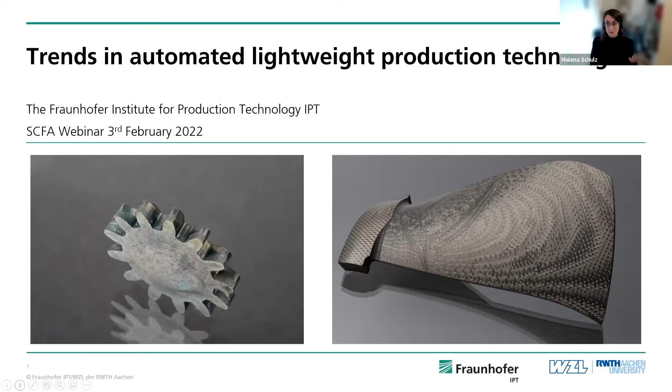Today we're going to show you how to produce composite fan blades or to process high-strength steels for lightweight structures. And we provide you with solutions how to do that in an automated and upscaled way, because we are system builders, or I like to say we're actually doing what mechanical engineering is called in Germany, because mechanical engineering is actually called building machines. So the word Maschinenbauer, and that's what we do here in our department. And we do that on the one hand for composites, and on the other hand for high strength steels, where we show you some applications and use cases. But let's start with our system technology.

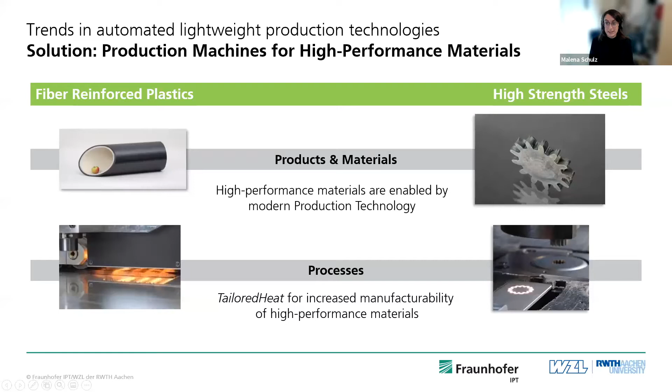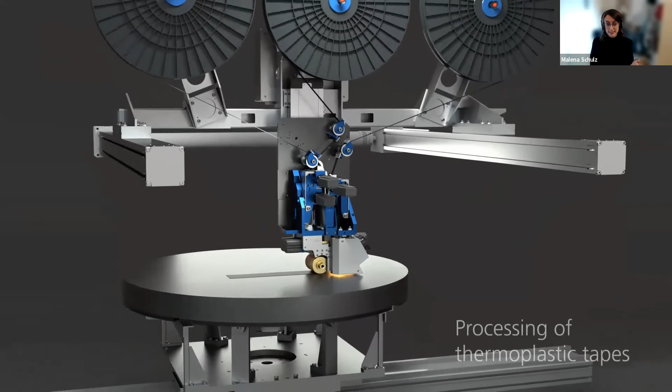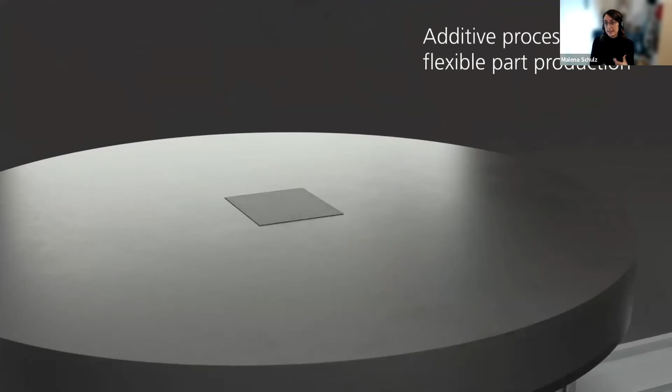As a leader in the composites group, we're building such machines, which you can see here in this animated video, where we stack tape by tape. That's how the composite material is called here, in order to create near net shape composite parts. And the new thing here, what we're focusing on, is especially to automate that.

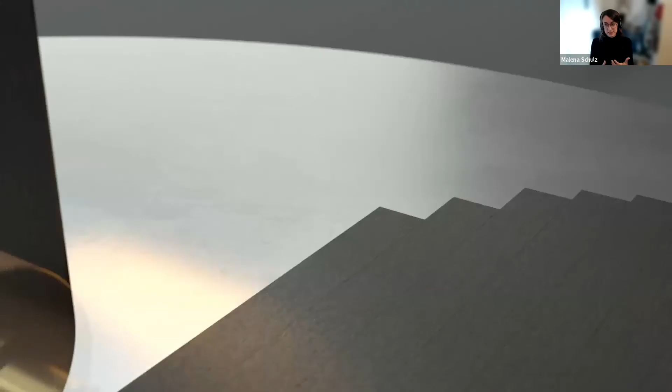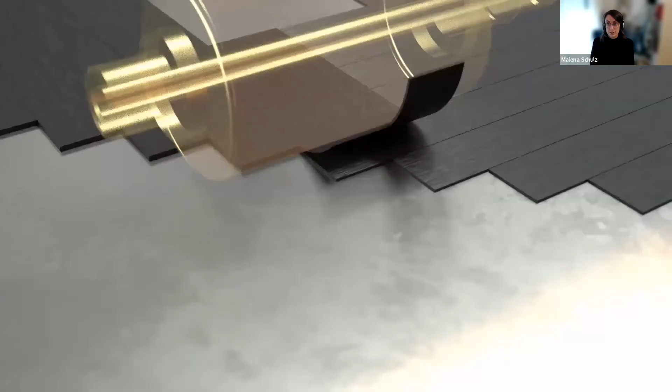So it's a lot about how to upscale composite production, which is actually a very manual based production technology, and how to use novel methodologies like digital twinning, etc., to increase the acceptance in industry, and also to provide the requested productivity, for example, in the automotive sector, in which more and more composites become apparent, but it still faces some challenges, especially regarding costs.

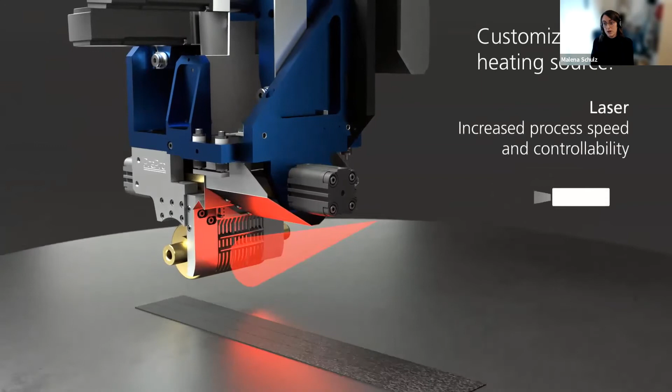And the focus we have here in our department is especially how to customize the heating source in order to gain these kinds of quality produced, near net shape parts. I hand over to Flo back again.

Okay, thanks. Maybe you thought initially, how do composite production and laser systems go together? But actually, as you might have already guessed from this little video, our processes are all about applying energy to the workpiece in a very controlled and precise way, in order to allow for the product quality that we want. And so in our group, we are more focusing on high strength steels as another lightweight material, especially

in the automotive industry. And one example is that we are researching how to bring these technologies into the processes that are already there and that are already very productive. And what you see now is that we have different heating technologies. So we are not only focused on laser technology, but we rather look at which technology suits the use case best.

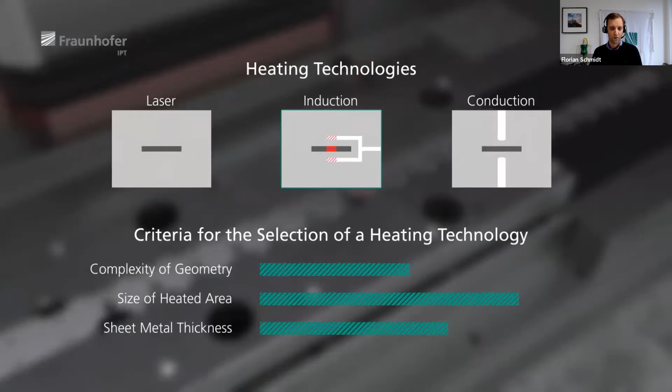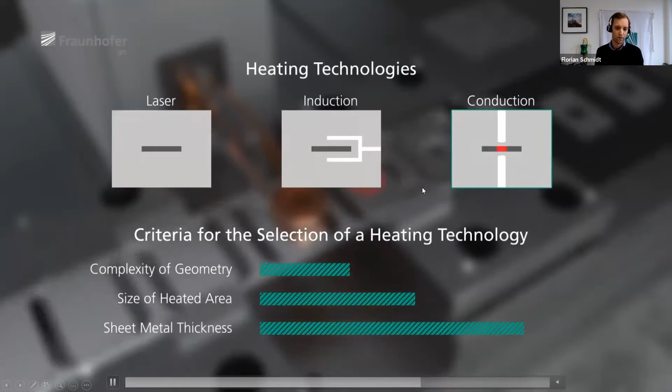So this, for example, is a continuous production of sheet metal parts. And we've integrated different heating technologies into the progressive die tool in the press. And so we are able to manipulate the material locally and within the cycle time of this highly productive process. For example, we also apply induction heating technology, or also electrical resistance heating. And this is really a case-by-case assessment, which one of these technologies is best suited for the application at hand.

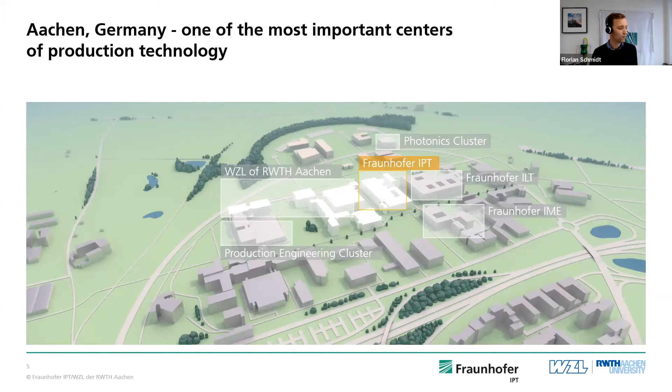So Aachen is quite a big research center for production technology, and we are proud to host 3 Fraunhofer centers at one location very close to each other, actually only a few minutes away from each other. Just very briefly, maybe you've heard some of these 4 names. So production technology is quite an interdisciplinary field. It's not only about a machine, it's not only about a process.

It's about how these two interplay, and it's also about how the quality of the process and of the machine is assessed. And finally, everything needs to be economical in the end. So that's why technology management is also one focus of our center. And these are the 4 professors that lead the 4 departments. And well, we are obviously from production machines, but we always have a good collaboration with our colleagues from the other departments.

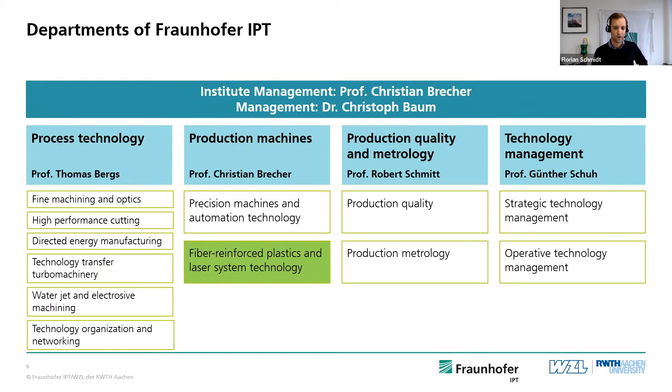So what are the current trends in automated lightweight production? So definitely we are facing the question of what the mobility of the future will look like. Just some buzzwords: we certainly have new energy sources like electromobility, or also hydrogen based mobility, and these have different implications for the structures of, let's say, vehicles, and also then the production technologies that are used

to build these structures. And on the other hand, we are also, of course, focusing on doing what we do more efficiently and more environmentally friendly. So, for example, recycling technologies or energy efficient processing, as you will see in the following slides, are big drivers of what we do.

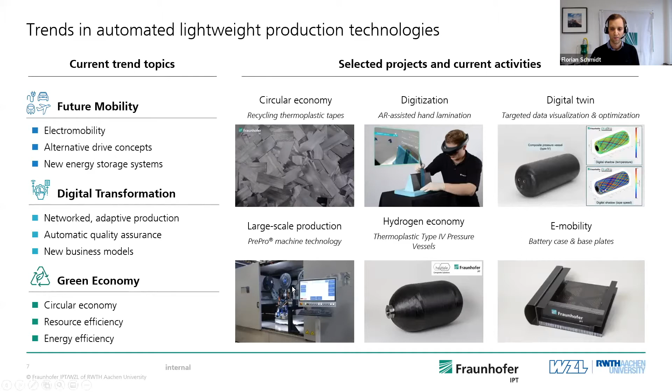So just to give you a quick framework about what lightweight means. Lightweight can have different dimensions, and today we are mainly focusing on different materials. So having materials with lightweight properties, but there is of course also lightweight design, like you've seen in 3D printing with optimized topologies, or different concepts of how to build new parts in a new way, or to integrate functions into lightweight parts. But as I said, we are mainly focusing on materials and of course the production technologies used to shape these materials.

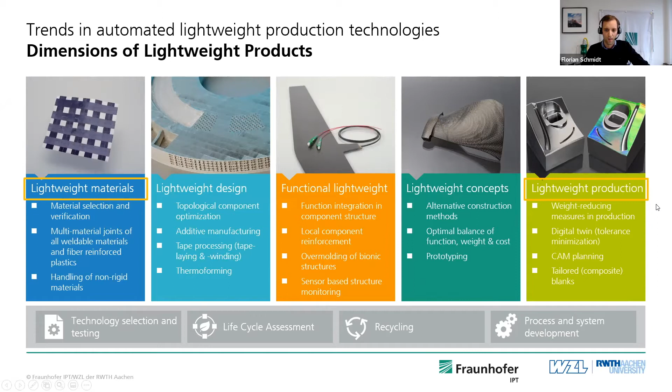What's the technological driver of different lightweight materials? We will focus on high strength steels and composites, especially carbon fiber reinforced plastics. These have a very good component weight ratio compared to conventional steel materials. With high strength steels, due to the higher strength, we can use thinner structures, saving approximately 20% of the weight for a comparable component. With carbon fiber, the potential is even bigger - you could halve the weight of your component.

But on the other hand, it comes at a cost, and that's basically what we are targeting. We are trying to develop new technologies that make the application of these new materials competitive, trying to cut down costs. Especially with carbon fiber, there's a huge cost disadvantage that needs to be justified. So that's our mission - to reduce this and bring these materials into application.

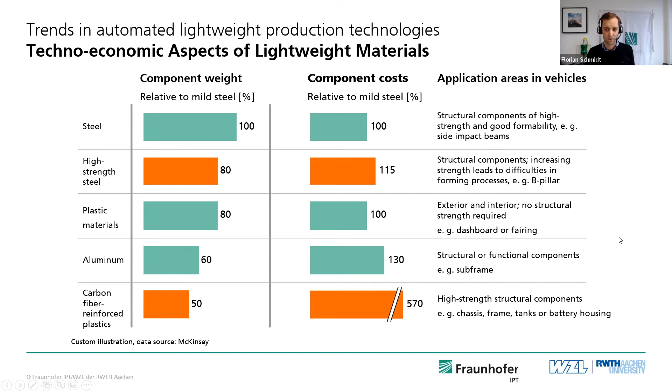On the other hand, based on the global trends you just saw, the composite market, the lightweight market is steadily growing, having surpassed 100 billion euros a few years ago. Especially high strength steels are increasingly used, particularly in automotive industries. I think composites are also growing, but it's still a kind of niche market that needs to find its way into mass production.

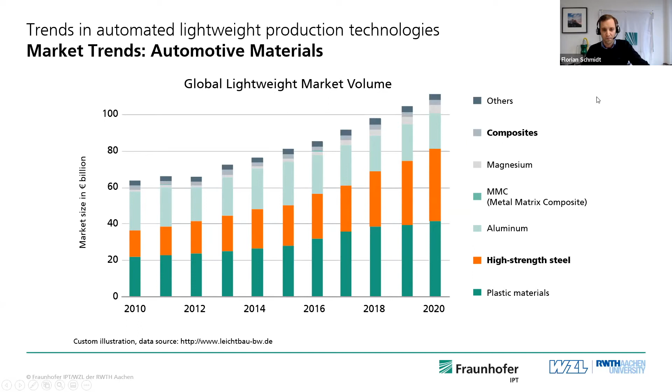One example - if you look at the current vehicle, this is McKinsey data about the projected material mix in a vehicle of the future. You can see there is increasingly more of these lightweight materials in a product, in a car, let's say, and this, as you might imagine, makes production technology a lot more complicated than if you just have 50% of very easy to shape steels, for example.

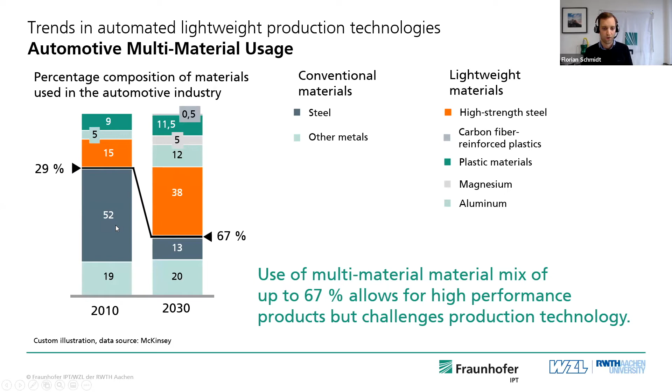So this is what drives our research. Trying to bridge the gap to what I'm showing you about our particular research.

I brought you one example about press hardening. You might have heard of that for sure. This is about heating press hardening steels in a furnace and then putting them into a tool, shaping them and giving them specialized hardness and strength properties. So this is the trend that we are seeing.

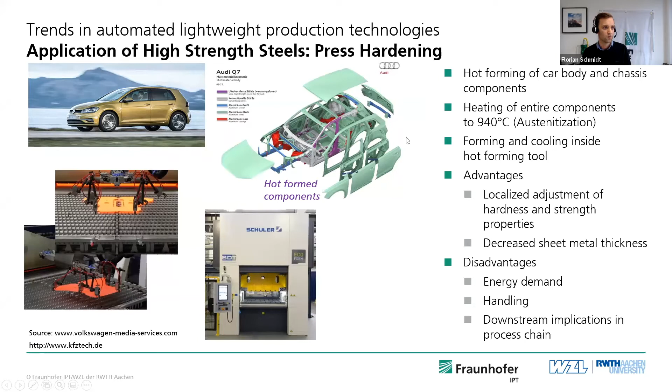It's not a monolithic component made from one material processed in a very easy way, but it's getting more and more complex, and you even have localized material properties, for example, in a B pillar or other structural components in a car. This gives you certainly a lot of advantages, but on the other hand, you have higher energy demands. You need to have your handling systems in place, and also it has different downstream implications, for example, if you want to cut these things in further processing steps, or if you want to integrate functions - it gets difficult if you increase the strength of the materials.

That's why we use thermal assisted sheet metal working for high strength steels. The motivation is really to enable the material, or enable the current processes like cutting or forming, to give us better results with these high strength materials.

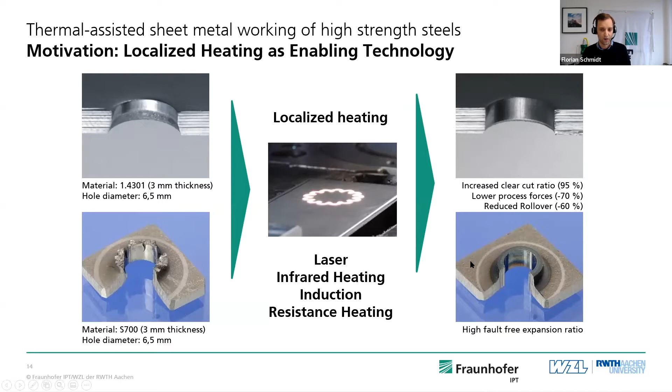For example, if we look at shearing, we are able to heat up the materials and increase the clear cut ratio, so you see there is less fracture, there's better quality of the cut. Also for forming, higher expansion ratios or higher forming ratios can be achieved by applying heat in a very precise way using different heating technologies.

So if you like, later on you can have a look at these videos again - this is some of our technology videos. But basically, as I said, we always look for which technology is best suited, for example, how complex your heating should be, how thick the material is, and how large of an area you want to heat up.

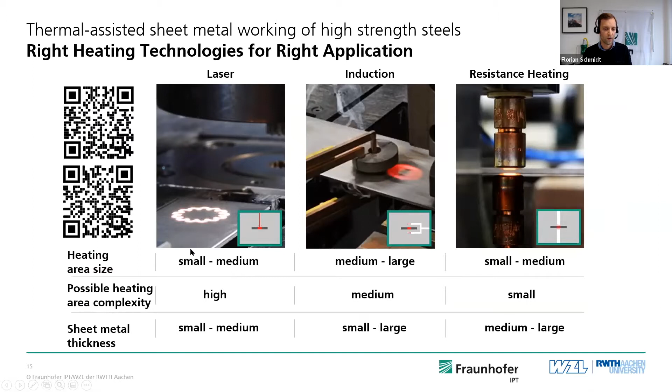Now I brought you some product examples that are from real world projects, either research projects or sometimes also bilateral projects. This should show you what different products could be made with these technologies.

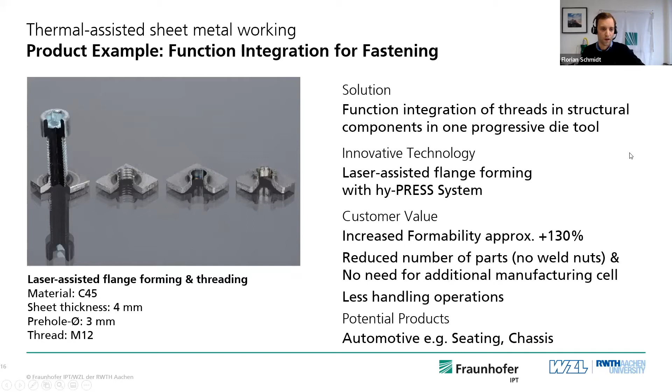Another example could be that we increase the formability by heating and also apply some tailored hardening.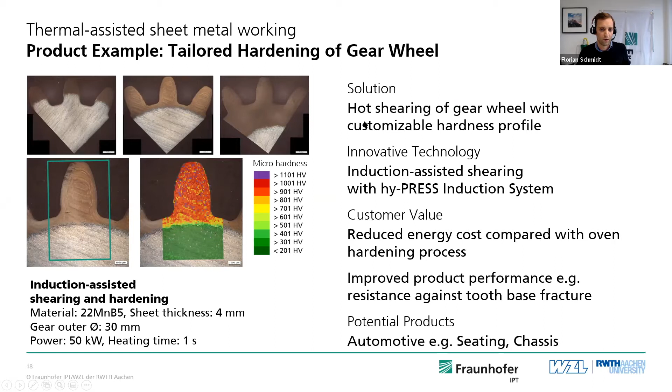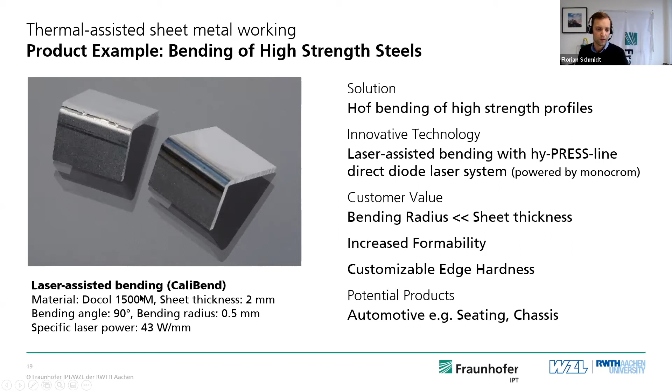You see where this is going. Basically, you can improve almost any process that you might imagine, from metal forming or cutting with heating. In this case, it's bending, and the benefit for the component or the customer would be more design freedom, because you can do these very sharp bends with very high strength materials at 1,500 megapascal yield strength.

And maybe another thing that is quite common now is the digitalization of production. With these parts that you have seen, it's always a challenge, because they are usually bulk parts, so it's very hard to get quality data storage based on individual parts. But this is actually crucial if you want to produce efficiently and have safety critical parts.

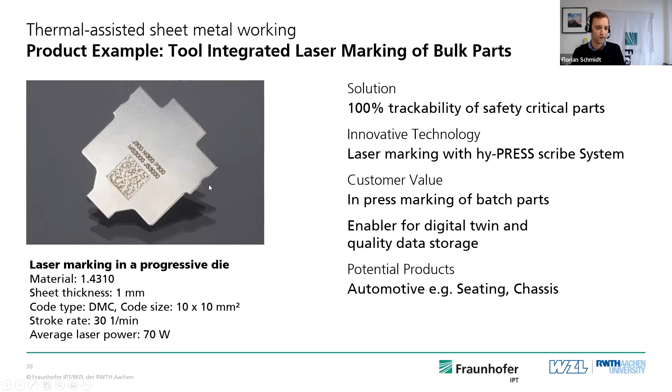So we developed a method that is able to do marking in the press, in the tool, so that you have 100% traceability, and then later on can take your quality data, your process forces from the tool, for example, and store that with the part. And you're always able to go back and see if something has gone wrong or not.

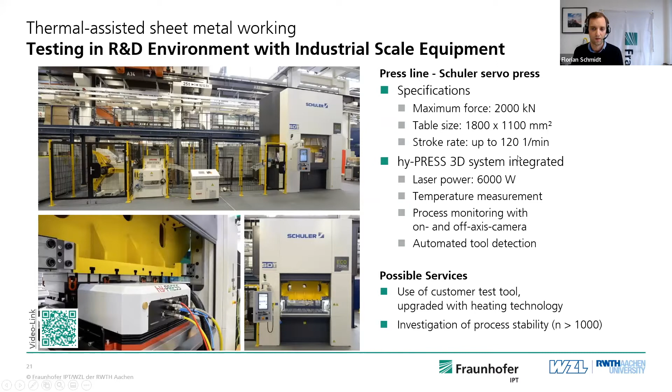Finally, maybe that also illustrates a little bit how Fraunhofer works. We always try to get the most up-to-date equipment at our workshops, so that we are able to, in an R&D environment, still use equipment that is relevant to industry. So this is our servo press line that can do up to 200 tons of press force, and stroke rates of up to 120 strokes per minute.

And so then we are able to use customer tools, integrate heating technologies, for example, and make evaluation of performance very realistically.

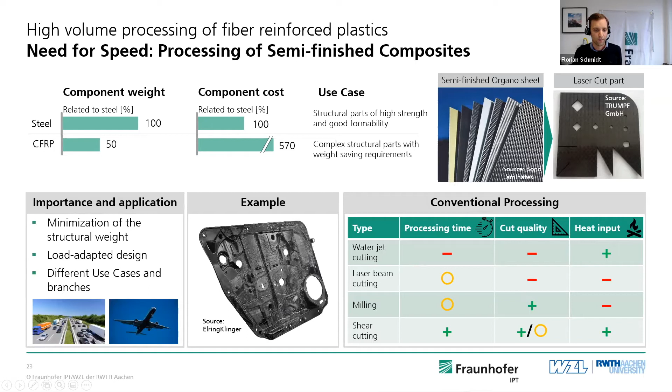So this is a topic that maybe bridges also the gap to Malena now. We thought, we are always processing sheet metals very productively, so why not do a technology transfer to composites? As you saw, we are getting more and more composite parts in vehicles, for example. This is like a door panel where all the components are fixed behind the nice interior of your door.

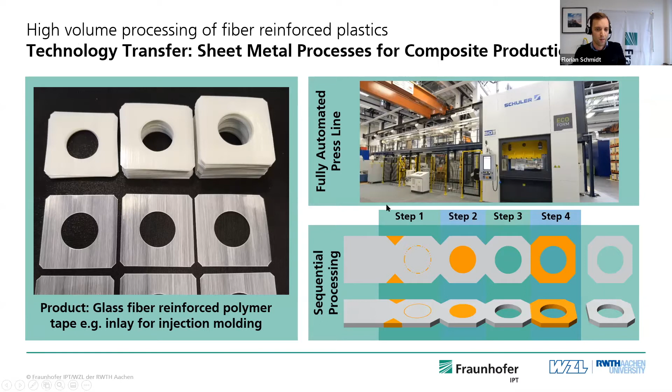And these are increasingly made from composites. The hardest part actually is trimming these components because of the abrasiveness of carbon fibers. You need to find a technology that is, on the one hand, quick, but also enables good cut quality and doesn't exhibit too much wear, which is really critical.

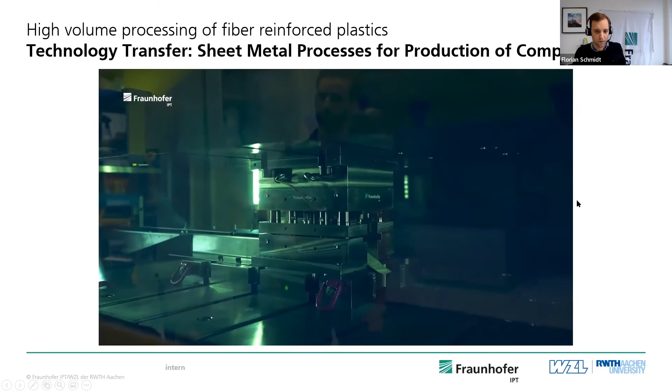And so that is why we have built up, in a research project, a progressive tool for a demonstrator geometry. This is glass fiber reinforced polymer tape that could be used, for example, as a reinforcement in injection molding. These are processed in a very quick way, as my colleague Tobias is showing you now.

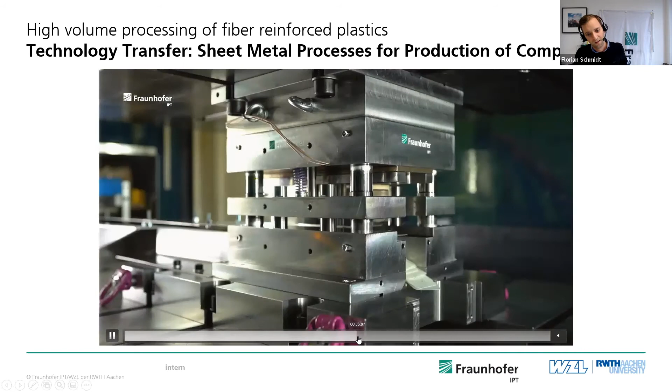So you see, like in metal manufacturing, we come from a composite coil, and then the material is fed through the tool. And these features are created by, for example, shearing.

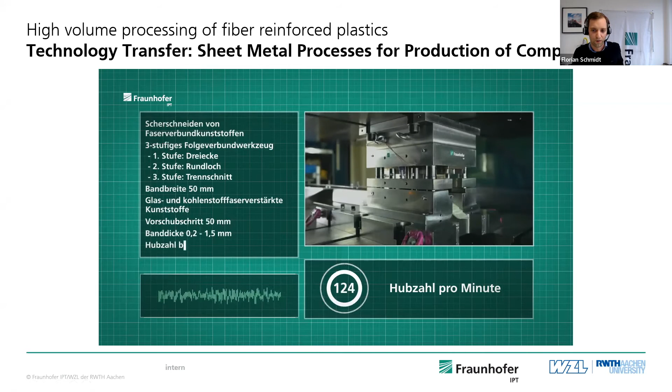You're going to see that we can achieve really high productivity with this kind of method. So we are here ramping up the stroke rate up to 124 per minute. And so this is a new level of production of simple composite parts.

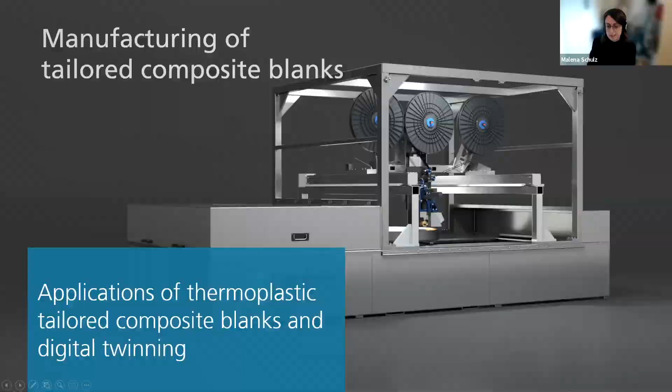Since the beginning of composite manufacturing, which was kind of triggered by the aviation industry, costs weren't a big problem. But as you have seen also by Florian's slides, composites need to face cost pressure in order to enable more applications in cost-driven sectors such as the automotive sector. This is why we have focused for nearly 30 years now more on thermoplastic composites than the usual thermoset composites, which are often used in, for example, the aviation industry.

It enables automated production of composites in this additive production manner, and this machine was set up to be very scalable. You can see the tape spools in this picture, and it enables simultaneously laying several tape spools - you can adapt it to, let's say, 3 or even 5 tape spools simultaneously. This lets you increase the amount of tape being laid, and thus increase productivity or output per hour.

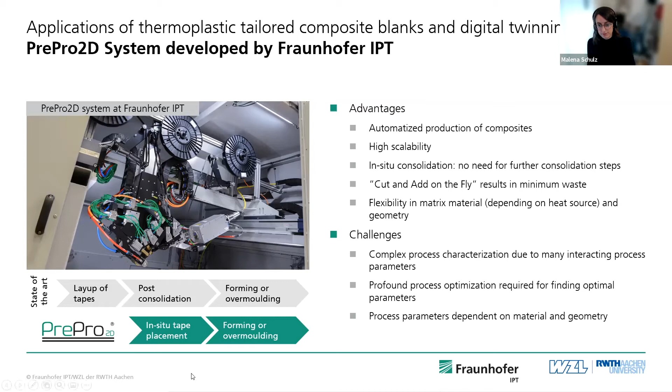Actually it's not so new - it came up already in the 90s - but currently the nice thing is that if you can provide a cost-efficient manufacturing technology, especially the automotive sector gets attention on that technology.

So what is currently happening, for example, is that this kind of technology is used for selective reinforcement, which can be used in the plastics overmolding process.

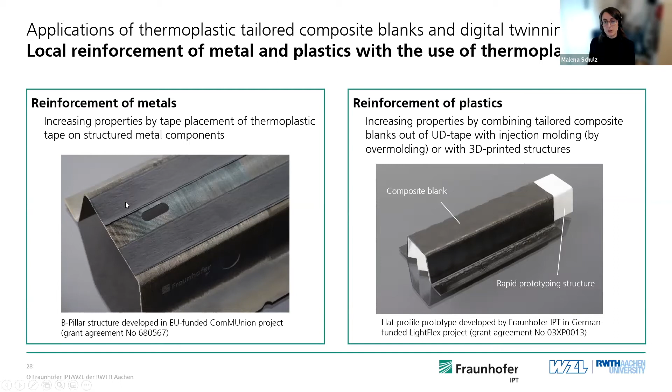But the nice thing with this technology is that you can use it to directly functionalize metal parts. On the left side you see, for example, a bumper part or a B-pillar part made of steel, where we've made some microstructuring on the surface of the steel. By that we can get a form grip between the plastic material of the tape, which you can see here as black stripes, and the metal part. So it brings a lot of design freedom with this technology.

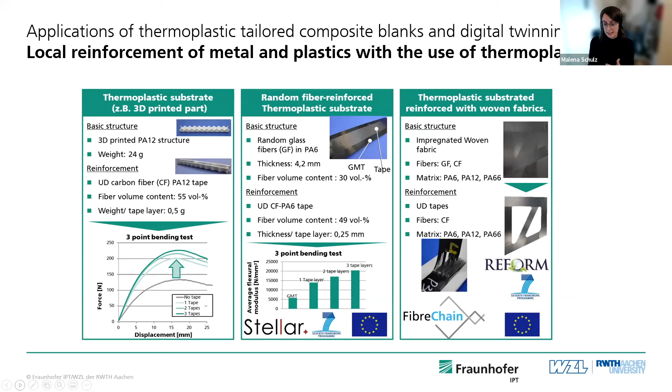Projects in recent years have shown that you really can increase mechanical characteristics such as in the 3-point bending test, and increase the stiffness of the part. The nice thing is that you can also stack the tapes according to your needs, so in this automated manner we're very flexible also with the fiber orientation.

So this means that at the end you have a very load-optimized laminate, which you could use in your application. And this is why I'm coming to the next application, where in the last years we came up with a new process chain regarding thermoplastic composites for aviation. This is the field of fan blades, which I mentioned at the beginning of this presentation. So we're currently developing thermoplastic composite fan blades.

The reason is, going back to that slide, that the current state of the art in the manufacturing of composite fan blades is actually pretty manual. A conventional methodology is to manually stack the prepreg layers with the thermoset matrix and then put them into the autoclave. Or there are also some resin transfer molding based methodologies currently on the market or in application.

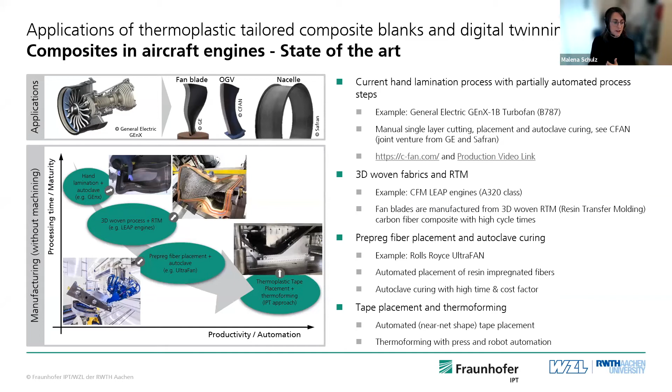But one of the drawbacks is that it's still not very automated, and additionally, thermoset composite materials have a lot of drawbacks regarding sustainability, since the material is not so easy to recycle. This is why in the last two years we came up with a process chain for thermoplastic composite fan blades, where you can use the machine which we have shown you so far.

The process chain for thermoplastic fan blade production looks pretty similar to the one for thermoset, but it's also a bit different. You can already see that one process step is neglected because we do not need it anymore. In the first step, for example, we use the machine I've shown you to automatically stack and consolidate the tapes.

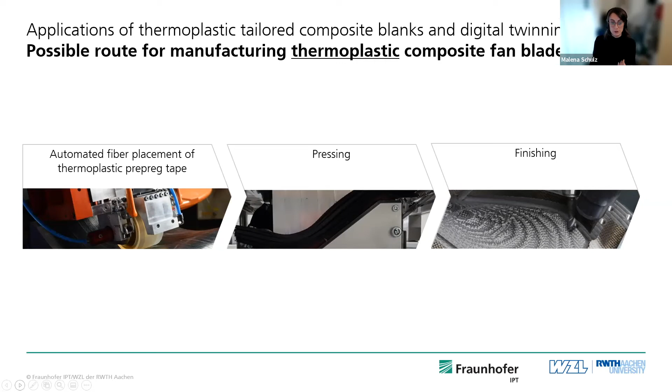Then we thermoform it into shape, which is an interesting part because you have to check the draping behavior, and then you finish it at the end to get the near net shape. The nice thing here is that we can create laminates with this in situ consolidation which have different wall thicknesses, so we don't create a lot of waste at the end. So this is how the actual process chain looks and how we set it up at our facilities.

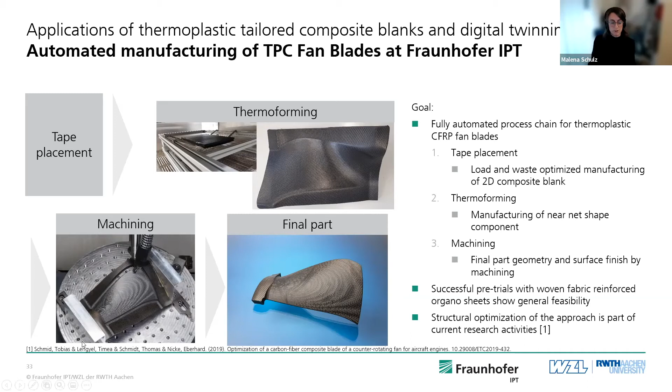Here you see, for example, the organosheets we have used, which are heated in an infrared oven and then pressed in the thermoforming step. In this case, we used as a benchmark conventional organosheets, which you can buy from stock, with a woven fabric inside. If you use the tape laying process, we can create stacks with different wall thicknesses, as I mentioned earlier, and then you wouldn't need as much machining capacity because you have less volume to machine. In the lower part, you can see the final manufactured fan blade out of thermoplastics.

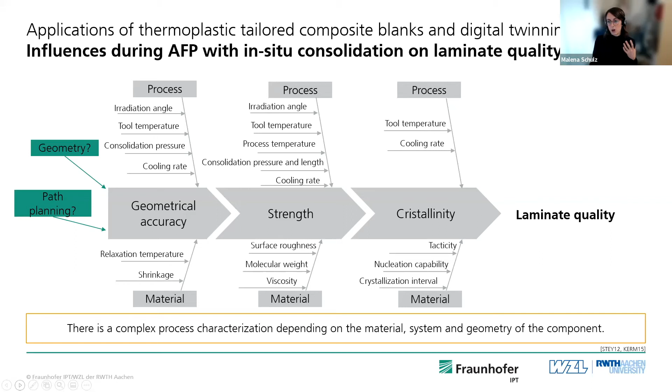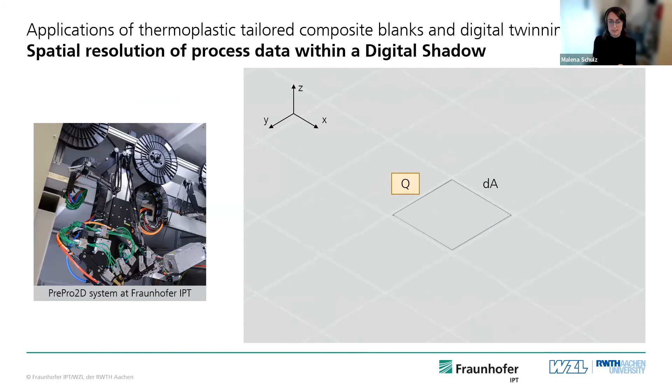There are definitely some challenges, for example thermal challenges in the application. But you can also integrate metal parts into it, as I said earlier, by this combined joining process, which is also possible with thermoplastics. So it gives a lot of potential for future production technologies and applications. However, there are a lot of challenges in processing with the locally thermally induced thermoplastic tape placement process. We are currently integrating the ideas of digital twinning to cope with this kind of complexity, and for us it's very important to digitize the spatially resolved data.

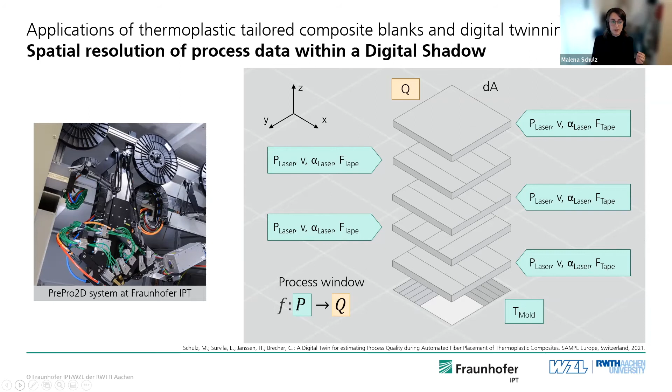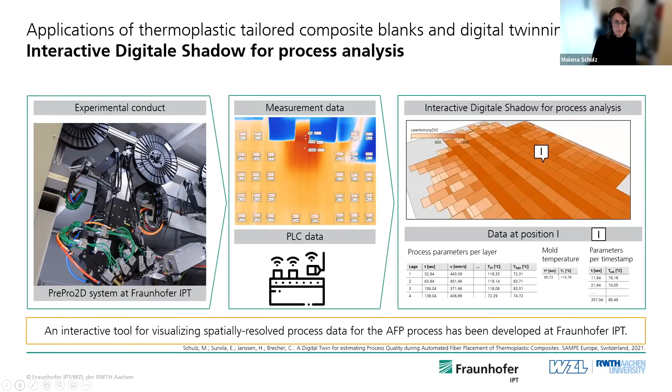So at the end, when we have a laminate which is processed by our machines, we want to see in what area we had, for example, defects or a quality issue. We want to spatially localize these process parameters and derive quality indicators, which is interesting if you want to give your customers a product together with its digital twin, showing that maybe in that area there has been a defect due to processing or due to materials.

So we have created this interactive digital shadow, which currently enables post-processing of the assessed data and visualizes each layer and what process parameters we have at which point. And we are currently creating models deriving quality indications regarding the final part. Okay, this regarding the automated manufacturing of composite sheet materials.

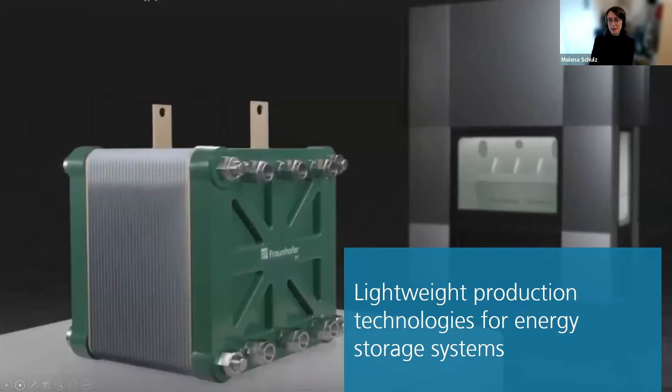Now I want to come from 2D sheets to three-dimensional products. But before that, I have to briefly explain our initiatives regarding energy storage systems, because this is a joint initiative by Florian's group and mine, and we are working very strongly on future mobility applications. The reason is also the growing market. As you may know, there is a big German-funded framework funding more and more initiatives regarding hydrogen and electromobility, and we really work on that as well.

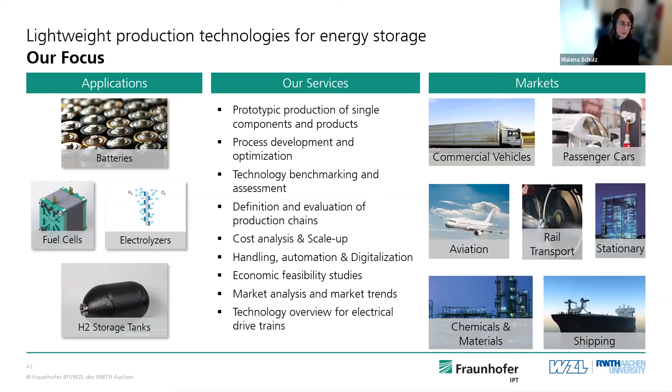We currently work especially on the case of how to upscale your production in these areas, because we see those technologies have kind of a high technology readiness level themselves, but they lack in the upscaling of the production. And this is what we're targeting.

And we see that not only with the automotive sector, we see it with the aviation sector, which is becoming more and more cost driven, and also shipping and commercial vehicles, where we need to face this huge amount of products we need to produce in future.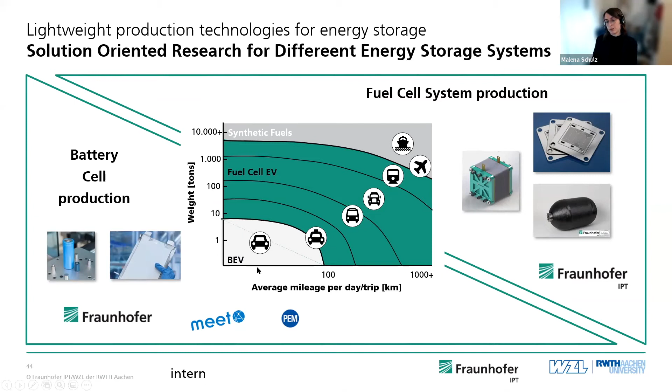So we have kind of two targets. We're not only focusing on hydrogen or only on battery cell production, because at the end, you have to apply the right mobility or energy storage system for the right application.

And we have a lot of competencies setting up currently in the area of battery cell production, where Fraunhofer is setting up a big testing factory in Münster, which we are very closely working on, but also in fuel cell system production, where we see the need for upscaling, which can be seen, for example, on this slide.

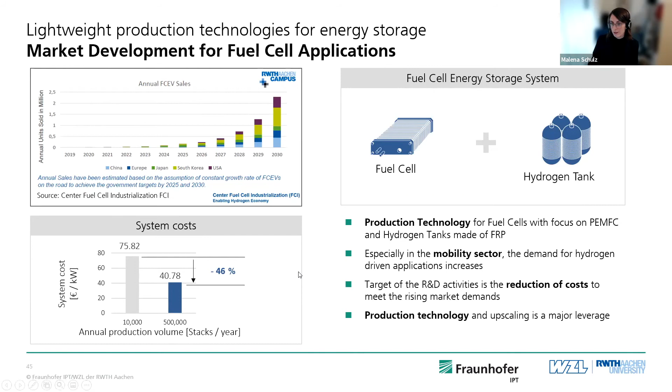We see that there's an increasing market of annual sales regarding fuel cell electric vehicles, and we need to face that. And in order to face it, we really need to decrease system costs by, in this study, 46% in order to get the supply of the systems.

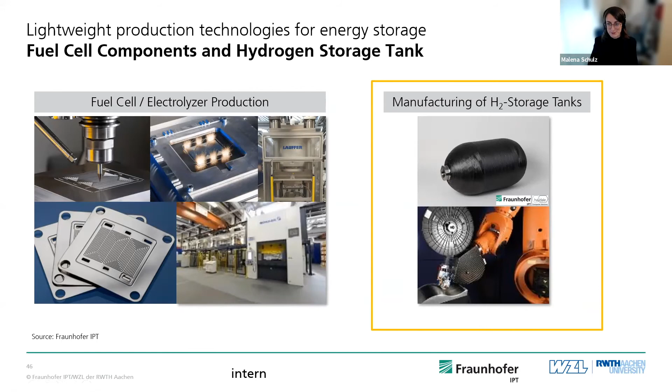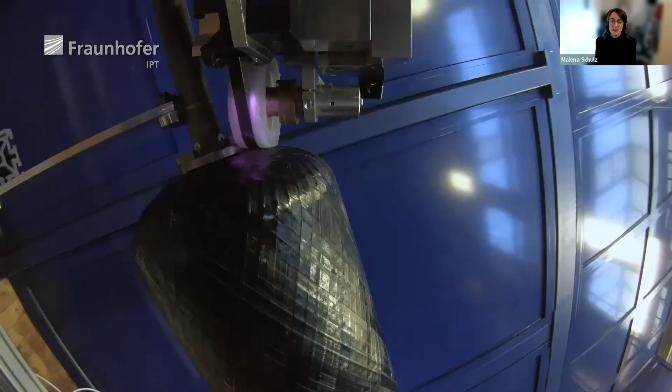And in the case of Florian's and my group, we're especially working on fuel cell stacks, as well as the manufacturing of composite hydrogen tanks. As you can see here on the left side, there's, for example, the manufacturing with the presses you have seen from Florian, how to manufacture these highly accurate bipolar plates for the fuel cell stack.

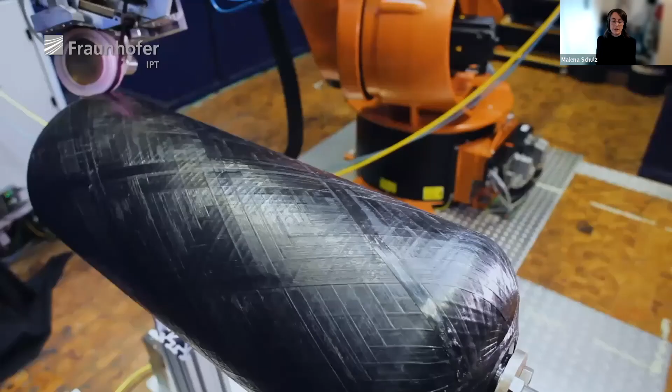And on the right side, which I want to present to you today, the manufacturing of composite vessels. This is the last use case we're going to present today. So here you can see the machine producing with the technology I already introduced for the 2D plates. This machine produces three-dimensional parts, for example, composite pressure vessels.

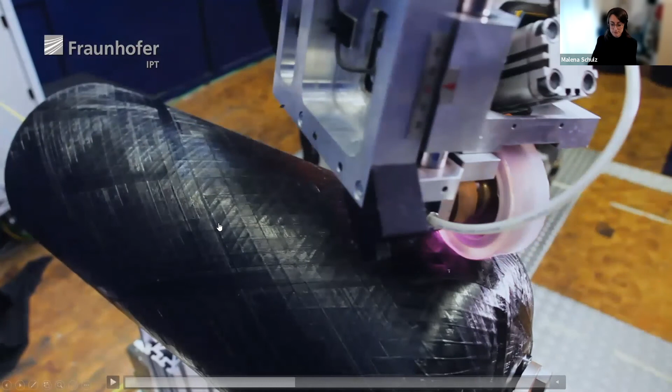This is a project which focuses on the one side on air pressure vessels with around 10 bars of pressure. But we also have a lot of projects currently ongoing regarding the manufacturing of hydrogen pressure vessels, where we need to target 700 or even higher bar pressures.

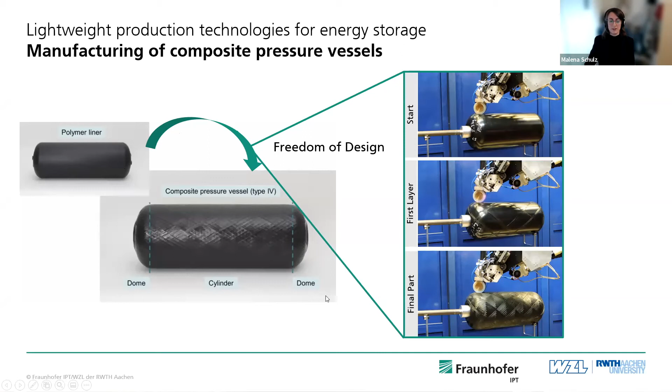And here you can see also how this is done, because the benefit of thermoplastics, which we are focusing on, is the creation of very customized layups. Compared to conventional composite pressure vessel manufacturing technologies, we have more freedom due to the in situ consolidation. We are enabling load paths which were not possible in the state of the art or the state of the industry.

And here again, due to the complexity of manufacturing, we have also created an automated visualization tool for the digital twinning of composite pressure vessels, which we use, for example, for optimizing our processes and systems as well.

And this is, maybe to conclude our talk, the very nice thing about our department, which I think is very motivating: if you build your own machines or optimize other machines, if you are really a system builder, or a Maschinenbauer, as it's said in Germany, you are also able to get your own source code of your machine, which enables you to really start your digital twin and digitizing efforts at the heart of the machine.

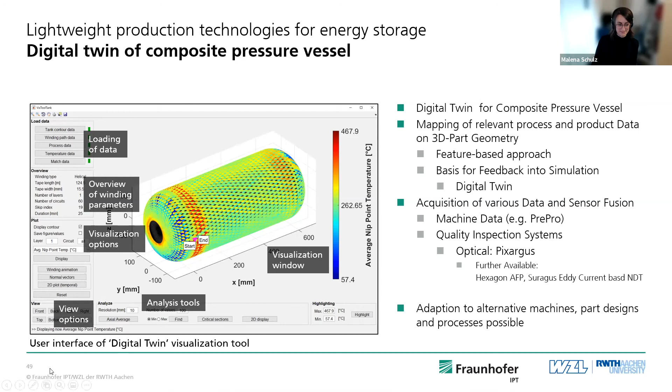And this is important if you go into digitization efforts with respect to process optimization, that you have to know your machine by heart and your source code, etc., in order to really get into online control systems of the machine. And this is what Florian's and my group have really been doing for a couple of years or decades in that area.